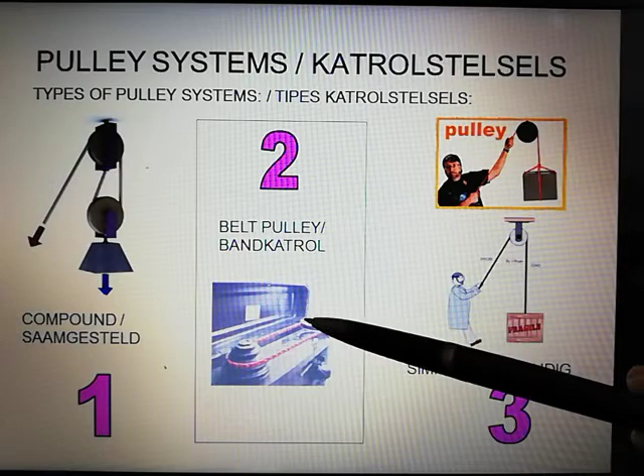The center one is a belt pulley system. This works almost like a gear system on your bicycle. Instead of gears, we just have pulleys. And this works on the diameters of the different pulleys. We'll get to that in a moment.

And in this one, the compound pulley system, you actually are gaining some force. So it's easier for you to lift something up. But like every mechanical system, if you score something, you lose something else. So the compound pulley system has got more than one pulley. You'll see the rope goes around the first pulley, around the second one, and then it's fixed down there. And this is fixed to like a beam or to something else.

If you have a 10 newton weight on this side that is pulled down, then you're going to have to apply only half of it. So simply what you do is you take this load and divide it either by the amount of pulleys, which is 2 in this case, or you can divide it by the falls in the pulley system. The falls are the times the rope crosses here in the middle, excluding this first piece of rope. So if there's 10 newtons here, you divide it by 2, so then you're only going to have to put in 5 newtons of force. Okay, I hope that helps a lot.

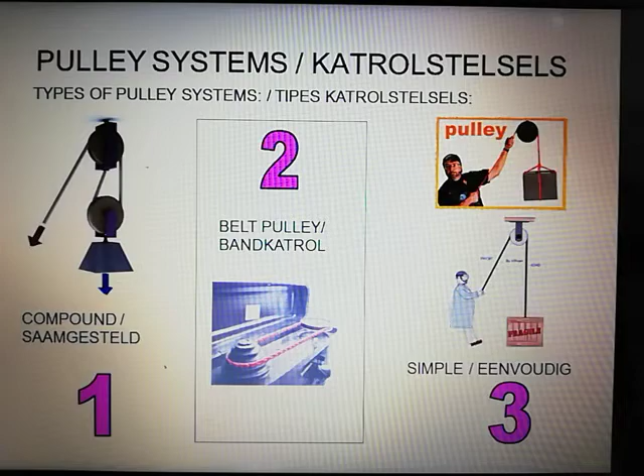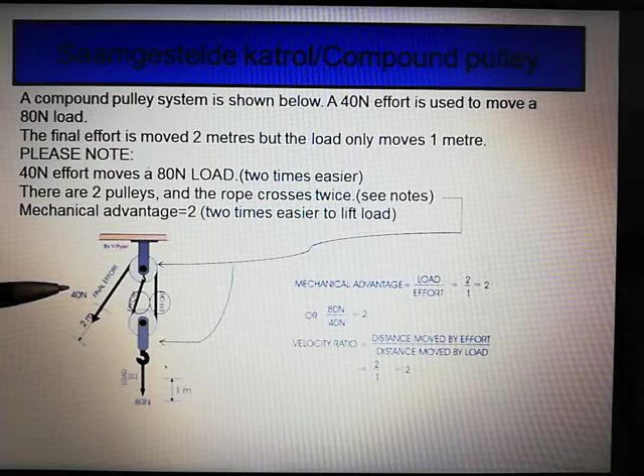But with all these types of systems, if you score something, you lose something else. And it's always in the same ratio. So if you look at this, the 40 goes into the 80 2 times. So it's 2 times easier for you to lift this weight. But you can see that it only lifts 1 meter on this side, but I have to pull it 2 meters on that side. So it's going to move a lot slower. Although you're going to gain some mechanical advantage, in other words it's going to be easier to pull this up, you have to pull it 2 times further than you would have on that side. So it's always in that same ratio.

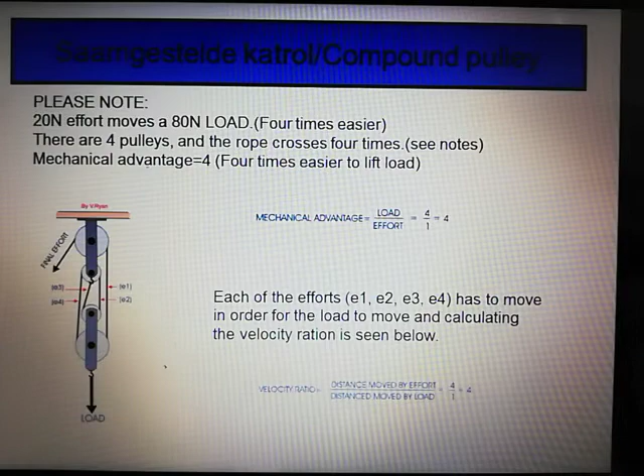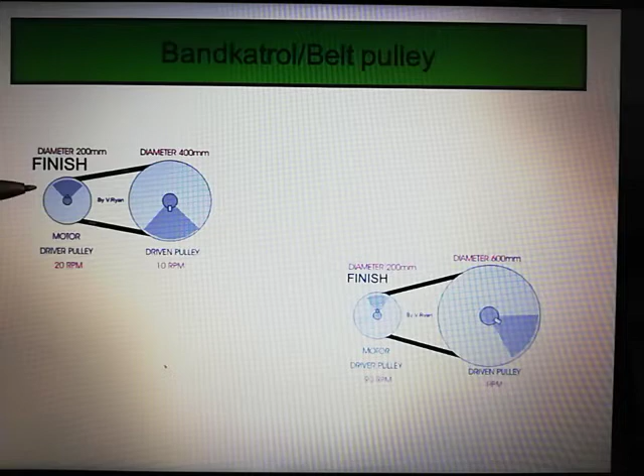There's the belt pulley system. In this one, you guys can quickly see that the input and the output direction is in the same direction. There's many things we can do here. We can either divide the diameters of the pulleys, or we can divide the circumferences in order to figure out the speed. It's the same principle. A small pulley will always run faster than a bigger pulley. Okay, so if something runs faster, it will always have less torque.

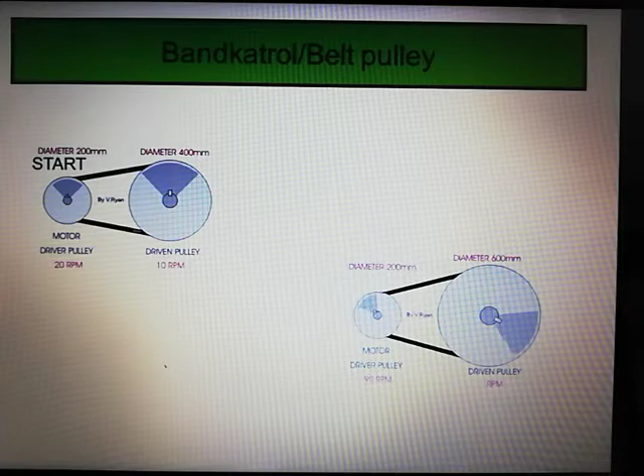In other words, if you put a heavy load onto this thing, something that you want to hoist up, it will struggle really a lot. But if you put the weight that you want to lift up, or the strain, on this one over here, it's going to run a lot slower, but you're going to gain a lot more torque. In other words, you can pull up something really heavy with this. So basically that is the mechanical advantage that we get, and you guys will see I've got it typed out very well in the notes that I'm sending you guys, so you can have a look at that.

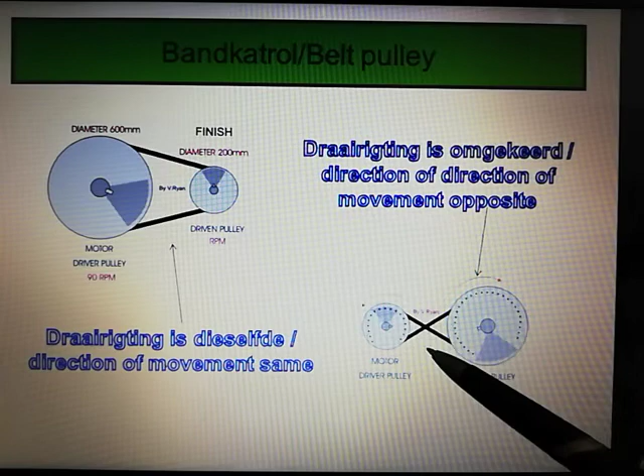There's just another example of how we turn the direction around. So we just take the band and we just cross it. So it's really easy. It's like taking a normal elastic band and you just cross it. So that makes it really easy to understand. So your elastic band is around this one, and then it runs like the figure of an 8 over this. Okay, so I hope that helps you guys.